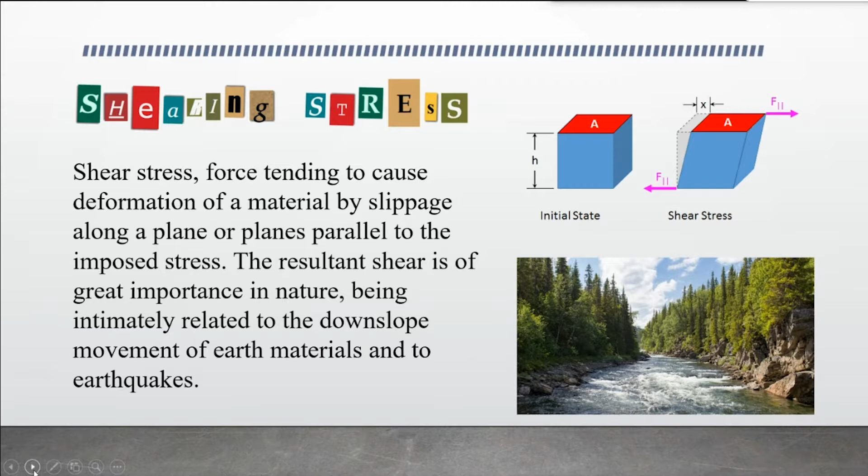Sample problem: The velocity distribution for laminar flow between parallel plates is given by the equation U over U max equals 1 minus 2y over h squared. The value of U max is 0.30 meter per second, and the water is at 15 degrees Celsius. We need to find the shear stress at the upper plate and give its direction.

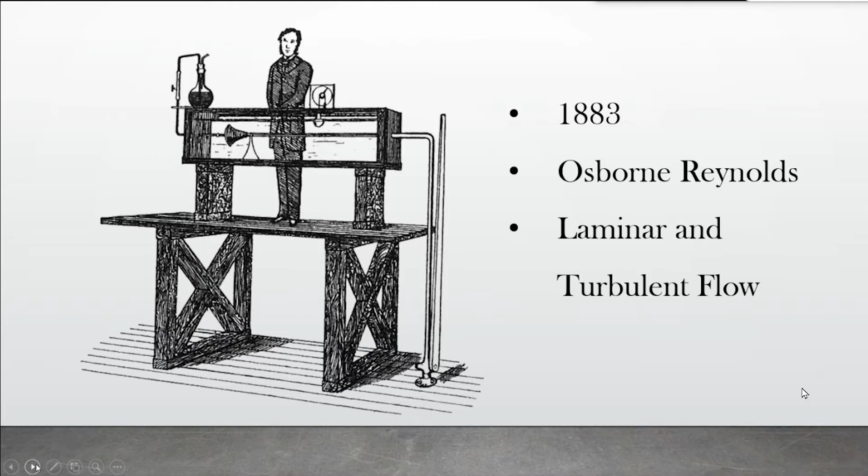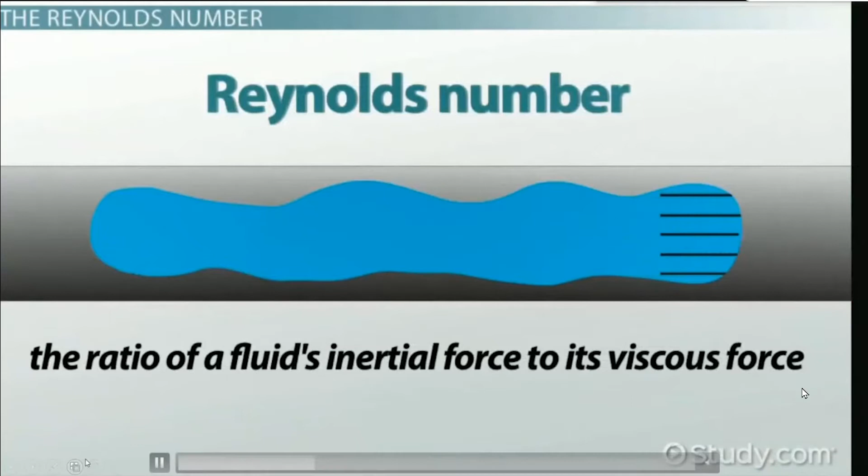Reynolds number is defined as the ratio of fluid's inertial force to its viscous force. Inertial force is the force due to the momentum of the mass of flowing fluid, while viscous force relates to the friction of the flowing fluid.

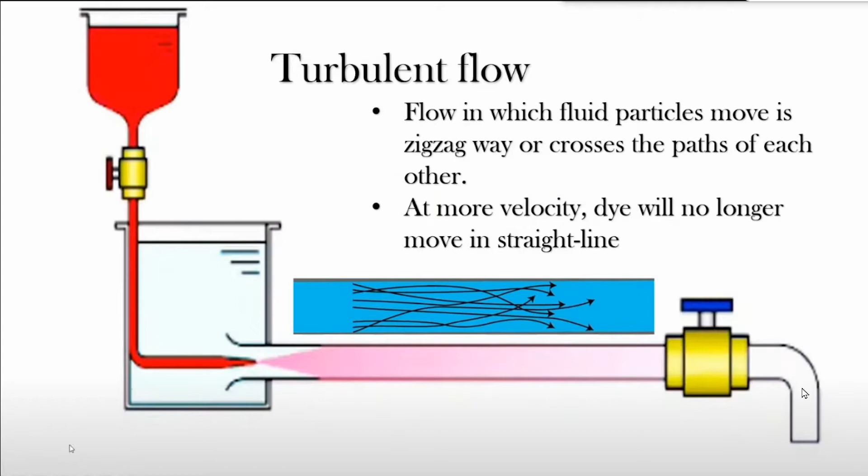The factors that cause a change from laminar into turbulent flow include an increase in velocity, an increase in the diameter of the pipe, and a decrease in resistance to flow.

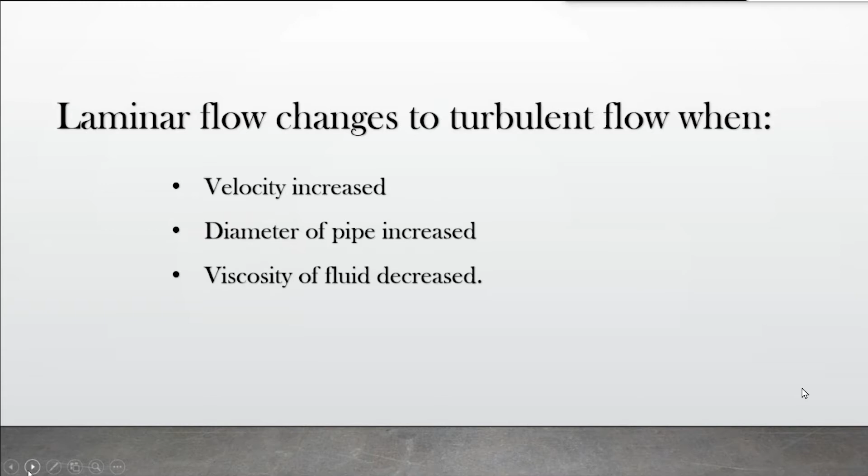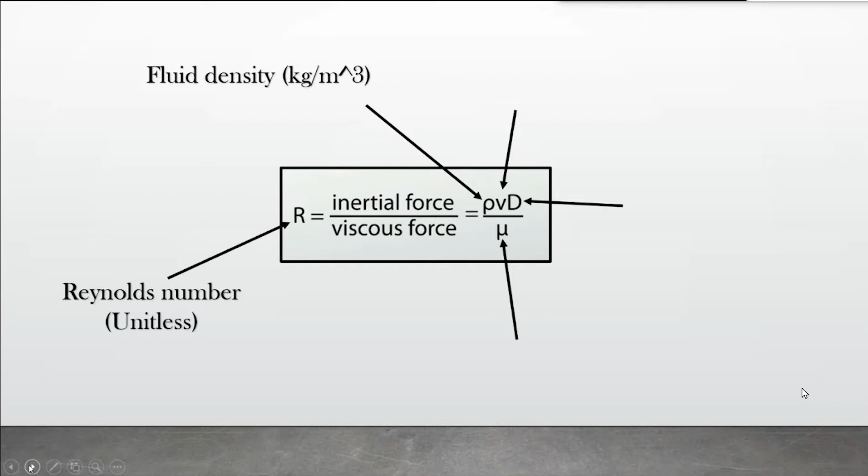Next is the formula for the Reynolds number. R is the Reynolds number, which is unitless. For fluid density, it's in kilogram per cubic meter, meter per second for velocity, meter for the diameter of the pipe, and viscosity of fluid in Pascal second or meter squared per second if it's kinematic viscosity in the problem.

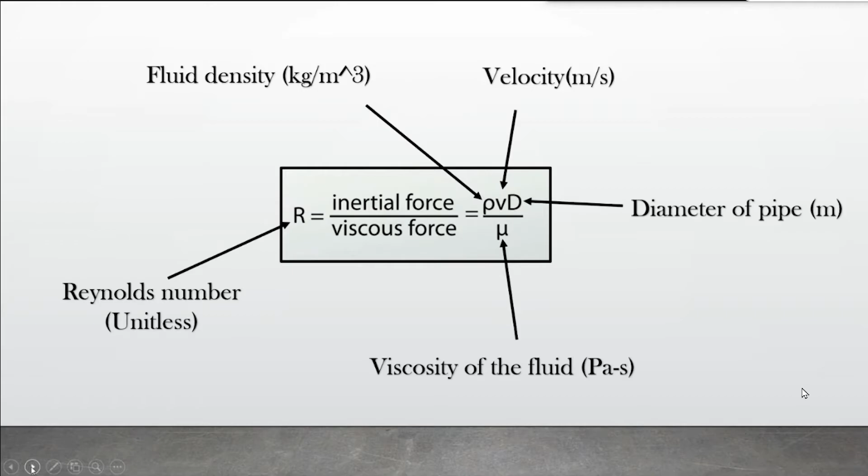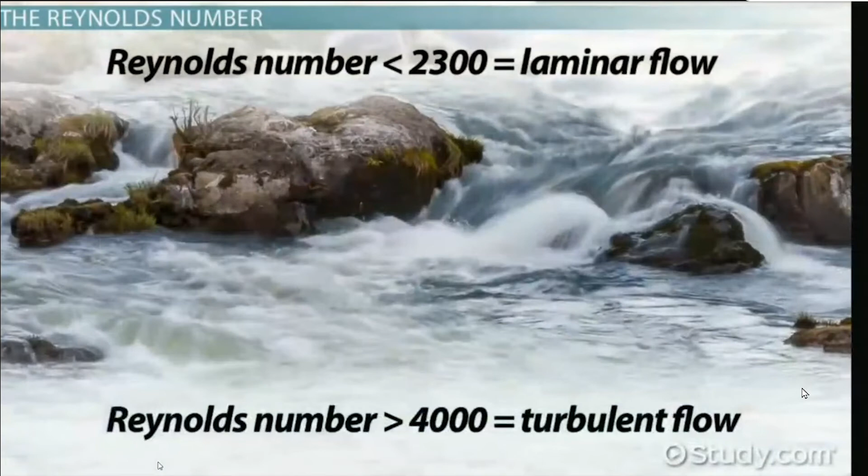Once we compute it, if the result is less than 2,300, the type of flow is laminar flow. If it's greater than 4,000, it's turbulent flow. And if it's between the two numbers, that's transient flow, where the fluid flow is transitioning between laminar and turbulent flow.

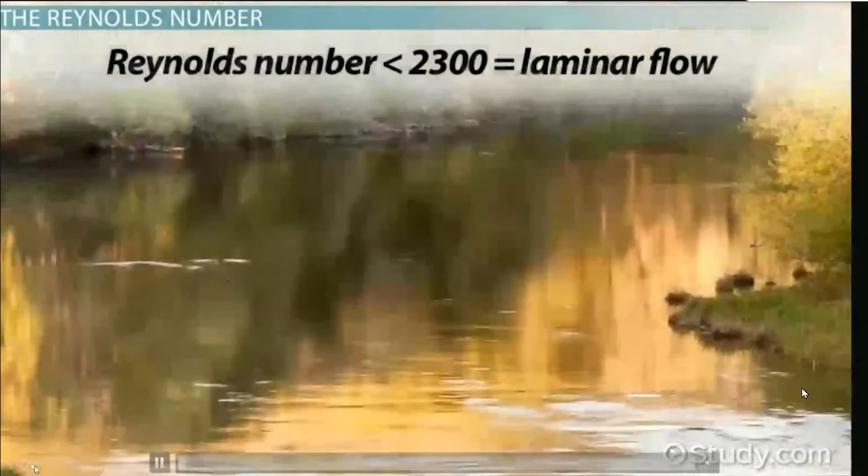Sample problem: A Newtonian fluid with a density of 910 kg per cubic meter flows through a 25 mm diameter pipe with a velocity of 2.6 meter per second and viscosity of 0.38 Newton per second meter squared, or Newton second per meter squared.

Determine the Reynolds number. Since we know the formula and we're given the density which is equal to 910 kg per cubic meter, 2.6 meter per second for velocity, and the diameter of the pipe is 25 mm. We multiply it by 10 raised to negative 3 since we need it in meters. Then 0.38 for the viscosity.

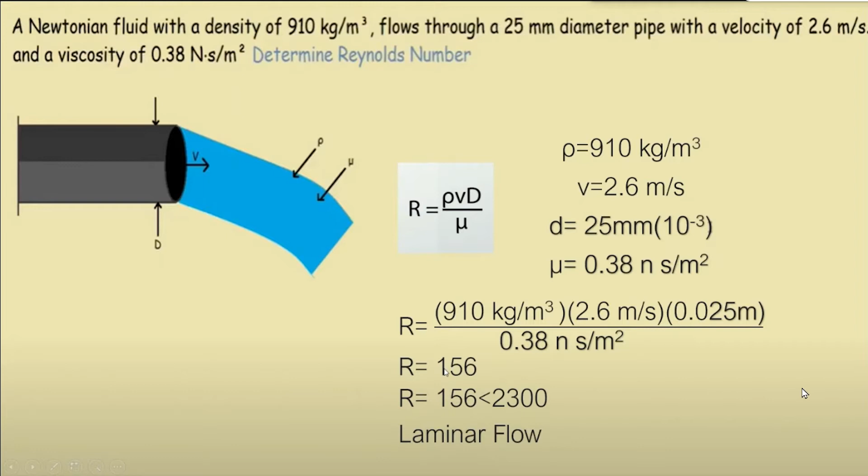0.38 Newton second per square meter. We just substitute these into the formula, and our answer becomes 156, which is less than 2,300. So the type of flow in this pipe is laminar flow.

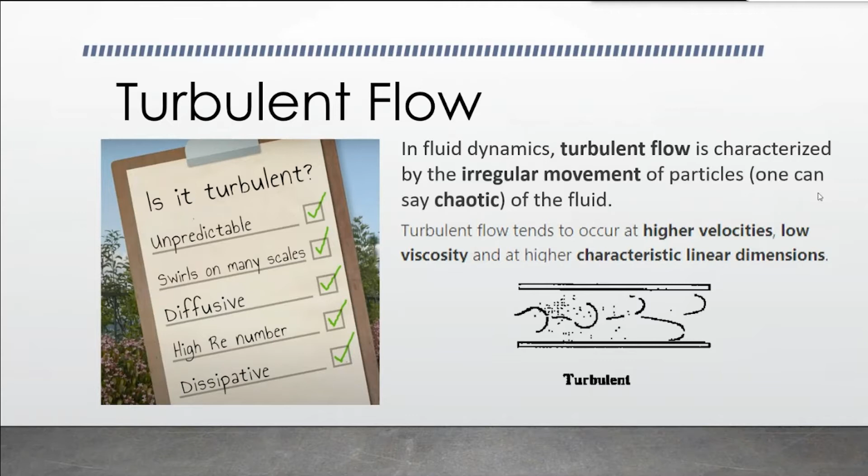Turbulent flow. In fluid dynamics, turbulent flow is characterized by irregular, chaotic movement of particles in the fluid. Turbulent flow tends to occur at higher velocities, low viscosity, and higher characteristic linear dimension. To determine if flow is turbulent: it's unpredictable, swirls on many scales, is diffusive, has a high Reynolds number, and is dissipative.

Turbulent wake. It's a disturbance or defect created in a steady flow. It's stronger due to convective acceleration.

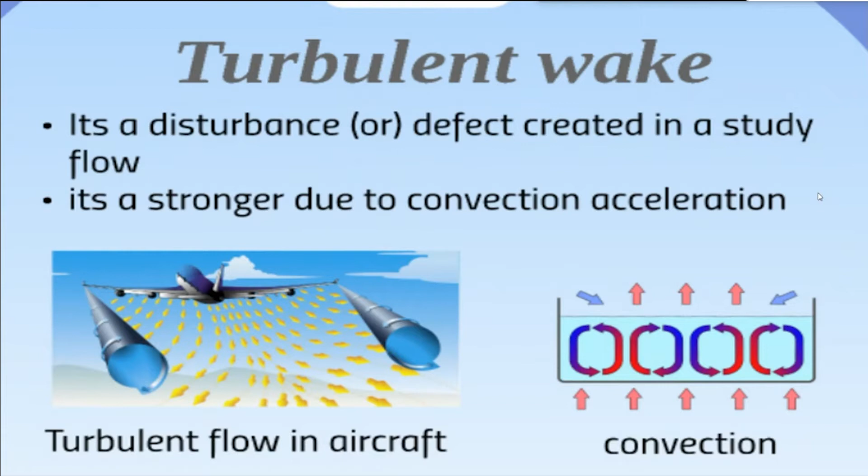Why is it important to know this? It carries great energy with it, a negative wake disturbance causing backflow.

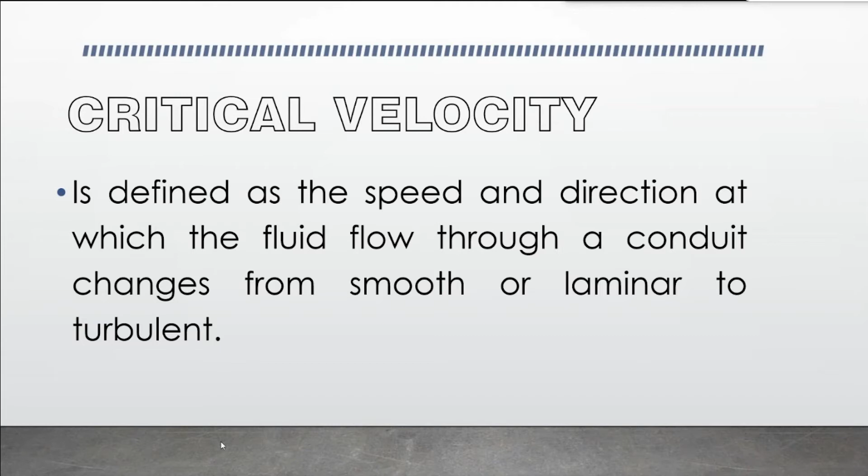The critical velocity is obtained from the formula: V sub c, the critical velocity, is equal to the Reynolds number times the coefficient of viscosity, all over the density of the fluid and the radius.

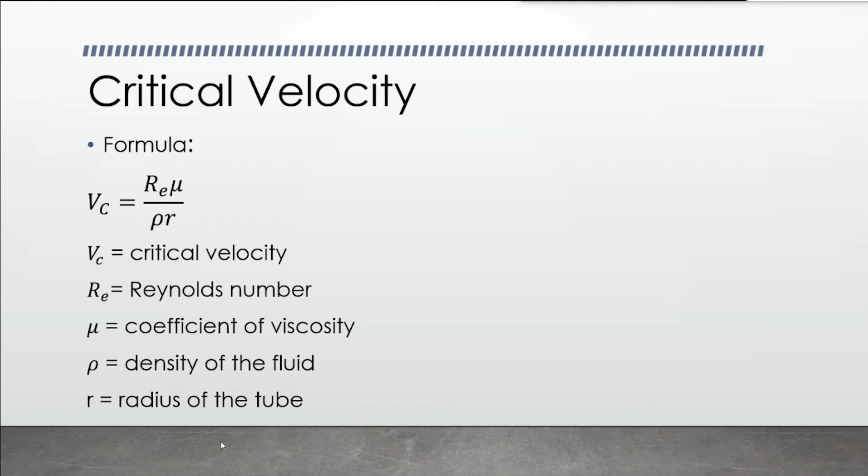Next, velocity distribution. Not all fluid particles within the pipe travel at the same velocity. Of course, many factors affect the flow, like the surface of the pipe, the smoothness and roughness of the pipe, which is why the distribution of velocity varies.

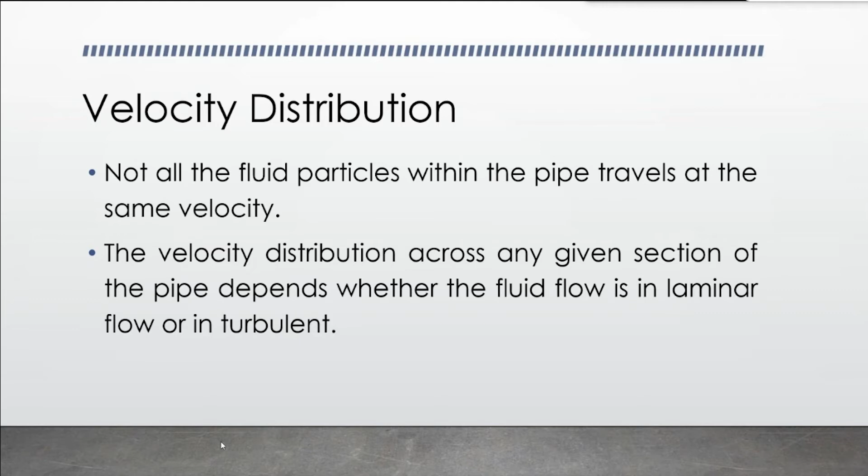So, friction factor. Today, since we've already mentioned concepts like laminar and turbulent flow, we will discuss the concept of friction factor. So, what is friction factor?

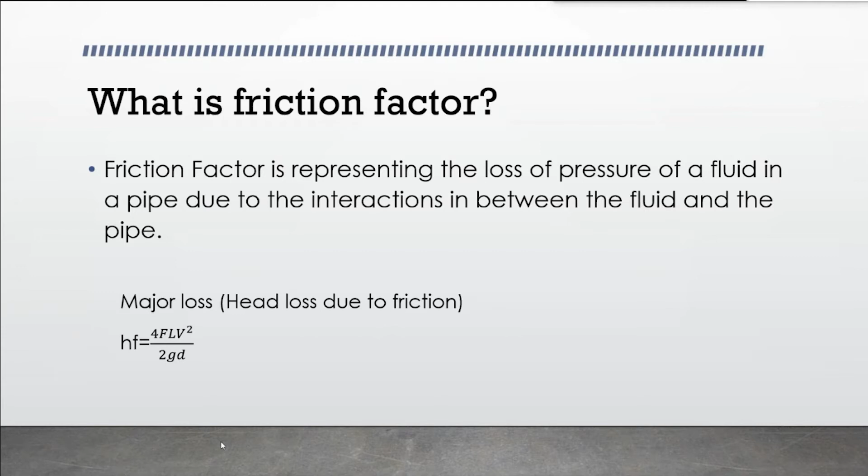Friction factor represents the loss of pressure of a fluid in a pipe due to interactions between the fluid and the pipe. The major loss or head loss due to friction is given by HF equals 4LFV squared all over 2GD, and this is called the Darcy-Weisbach formula, where F is called the friction factor. For that, we will show you a graph to explain.

In this graph, on the x-axis we have the Reynolds number, and on the y-axis we have the friction factor. From this graph, we can see that if the Reynolds number value is less, the friction factor is more or increased. The Reynolds number value would be less if there is laminar flow. Then if the Reynolds number is increased, the friction factor case changes.

In that case, the friction factor is reduced. As we can see here, the friction factor is reduced because the Reynolds number increases, and that is the case of turbulent flow. The friction factor is directly related to the head loss due to friction, that is directly proportional to HF. So if friction factor is greater, HF value will go on increasing. Similarly, if friction is less, the HF value will decrease also.

So in short, if the Reynolds number is less, that is the case of laminar flow, and the friction factor will have a greater effect, and hence the head loss due to friction will increase.

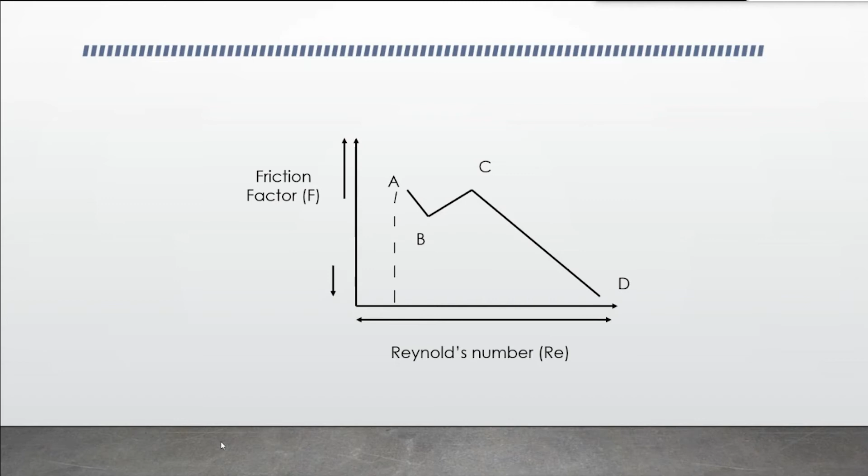Next, here are the formulas to get the friction factor for both laminar and turbulent flow. For example, for a circular pipe, if the Reynolds number (RE) is less than 2000, it's called laminar flow, and the friction factor formula will be F equals 16 (constant) over RE. While if it's turbulent flow, if the Reynolds number is greater than 4000, the formula of friction factor will be F equals 0.09 over RE raised to 1/4.

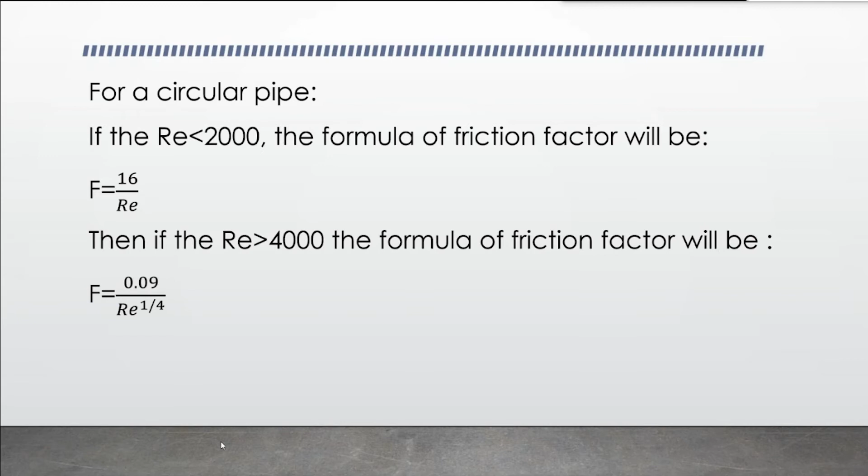What is the Darcy-Weisbach formula? It describes the flow of fluid through a pipe. The flow of liquid through a pipe is resisted by viscous shear stresses within the liquid and the turbulence that occurs along the internal wall of the pipe, created by the roughness of the pipe material. Weisbach first proposed the equation we now know as the Darcy-Weisbach formula or Darcy-Weisbach equation.

HF equals F times L over D times V squared over 2G, where HF equals head loss in meters, F equals friction factor, L equals length of pipe work, and D equals inner diameter of pipe work. V equals velocity of liquid, and G equals acceleration due to gravity.

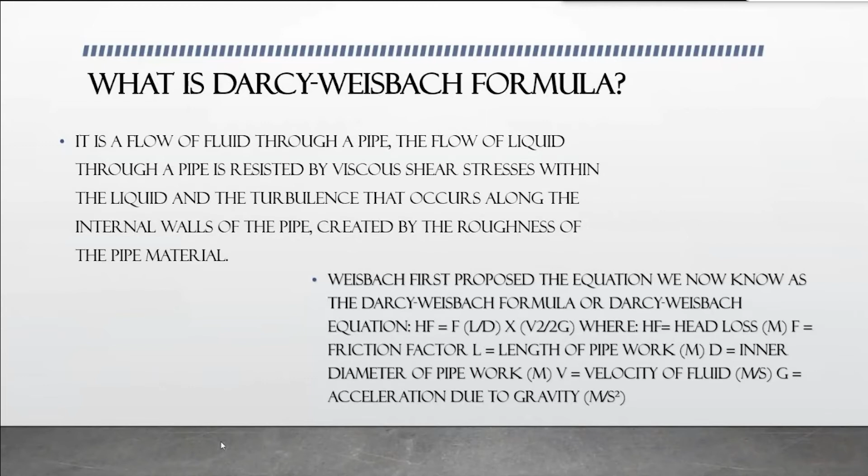Head loss of Darcy-Weisbach equation: Delta H equals F times L over D times V squared over 2G. Darcy-Weisbach equation: HF equals F times L times V squared all over 2GD.

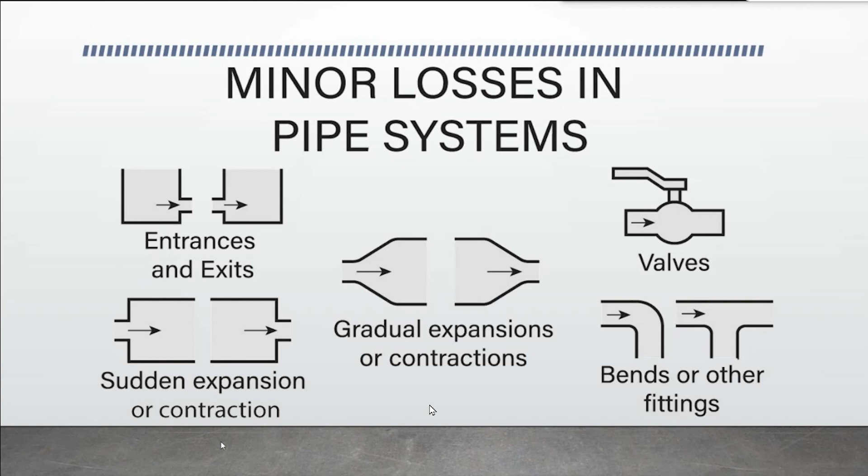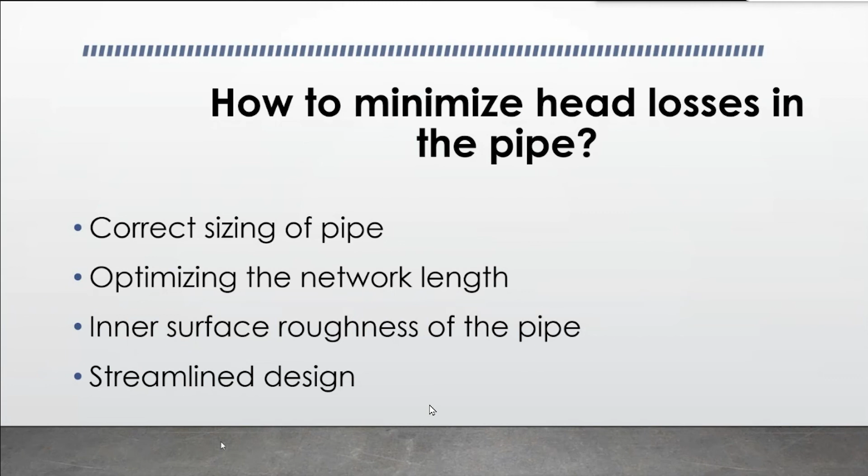How to minimize head losses in the pipe: correct sizing of pipe, optimizing the network length, inner surface roughness of the pipe, and streamline design.